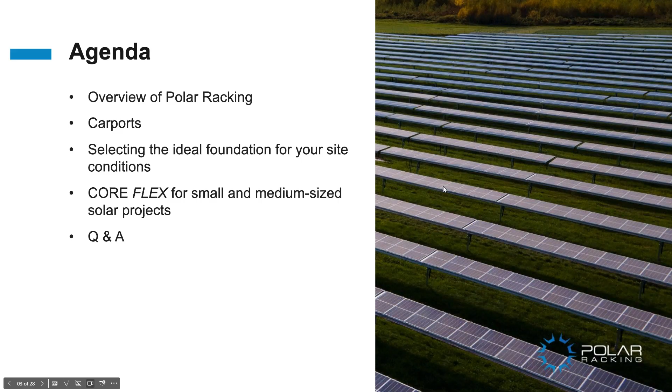So about us, we're the North American leader in the design engineering. Oh, I think we went back there one, Keith. Oh, mine shows the Polar Racking slide. Oh, strange. One moment. Oh, there we go. Coming up for me.

Perfect. So we're the North American leader in the design, engineering, and manufacturing of PV-mounted systems. Our vision is to deliver the highest value to our clients at the lowest kilowatt hour possible. We're able to do this by offering a turnkey solution, which is modular, lighter, and quicker to install versus many of our competitors. We have full service customer support. This includes a variety of things, including engineering collaboration tools, technical services, and installation support.

By that, we mean that we have multiple reps all across the country. We have myself and Andrew Golding based in Calgary, and we handle the West. Keith also comes out here as well. And then we have Matthew Crevier, who handles Ontario and Eastern Canada, and Keith helps support him that way as well. So should you have an issue or there's something that we need to come to site for, we could be on site in as little as 12 to 24 hours.

So we have a diversified portfolio that services multiple industry sectors, including commercial, community solar, and utility scale projects. So within that portfolio, we have our fixed tilt ground mounts. We'll cover all these in a moment.

Oh, there we go, perfect. Yeah, you can just leave it here.

So our primary product line that you'll be working with through BayWa would be our CoreFlex system. The CoreFlex system is an off-the-shelf racking system available at BayWa. Generally, we like to keep this in stock. It's designed to meet the demands of Canada's climate. We've designed this with the cold, the hail, all these things in mind.

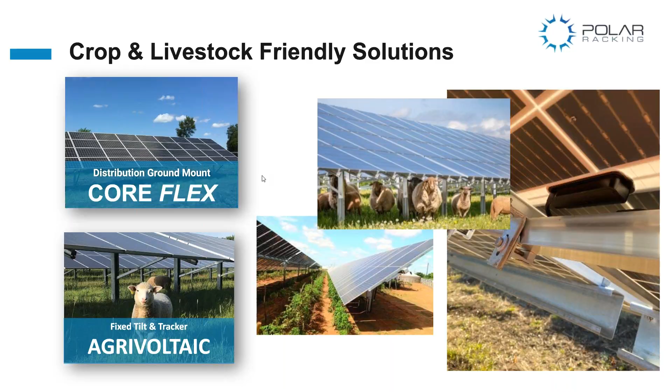Thank you, Joe. Yeah, so just wanted to talk about the CoreFlex system. This is our biggest seller with BayWa. It's the most versatile system we have. It's built to go anywhere in Canada, with the exception of a small area, which we'll go over later. You have to have the foundations designed specifically for your area, but we have everything from a single post, dual post, can fit the majority of available panels onto the system as well, and up to 1 megawatt in size.

This is a very practical system. It doesn't need the special engineering for each site. You're able to design the foundation site specific, but still have the feasibility of the rack off the shelf. It comes with galvanized steel G90, but let's just go through the product, the details, its features, and all the adjustability it has as well. So this Core system's been around for quite a while.

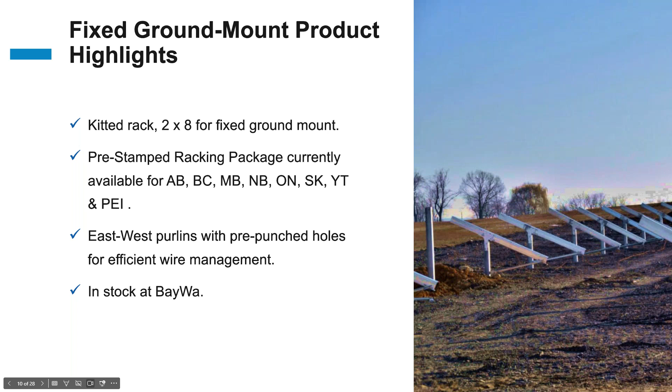Also, they're currently in stock with BayWa, so if you need any, you can get them off the shelf pretty immediately. This is the package we get, the data sheet from the trade shows. We're going to make this downloadable or pass it along to BayWa as well. So it has a lot of the just generic information for wire management, structure, formatting, and all that fun stuff. And it's a general layout of the system.

So if you have the larger panels, you'll see there's a gap in the middle for the smaller panels, and then the larger panels just go end to end. It is very modular based, so you're not going to get 100 panels long touching with no seams, but this is designed so that each table can work independently and not count on the others. So if you have a site that you don't need a layout for, you can just go and build them wherever you have to. We have some sites where they're built on the side of a hill, so they put 5 tables here, 5 tables there, and go everywhere.

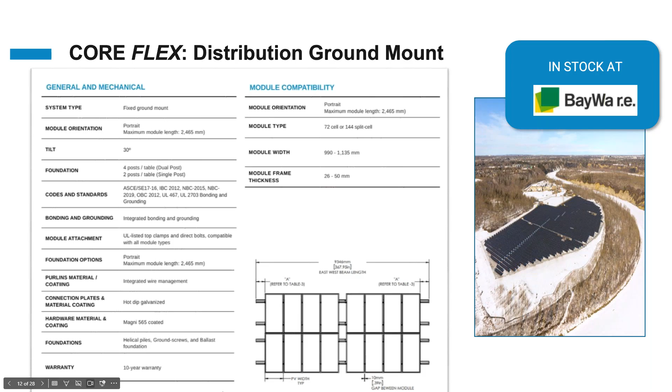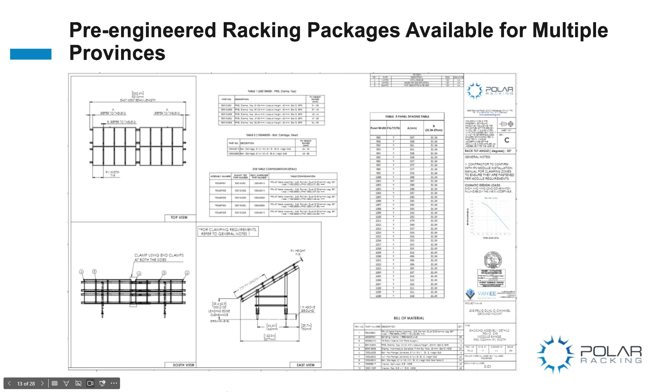And this is, again, the rest of the design package that goes over the parts, the assembly, often needed for submittal for any building codes or submitting to the community before you go live with your system, but this is the part of the package you'll receive once you're complete and you meet the foundation requirements.

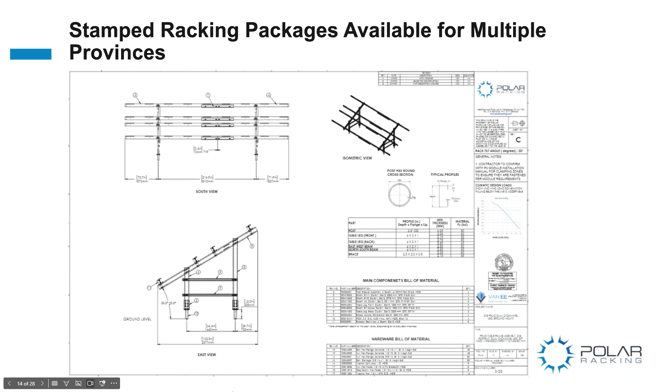So just going over the general parts, you have your A-frame, which is parts 1, 2, and 3. That system could be a single post or a dual post, depending on what you end up choosing. The most commonly stocked is a dual post system. However, there is a single post conversion kit, which BayWa, I believe, has now. I know that was something we were talking about years ago, it feels like now, but I'm 90% sure you guys have the conversion kit to turn a dual post into a single post. And again, that comes down to your foundation decisions later.

You've got your larger east-west beams. So they're what take the brunt of the labor. That's your beams, number 5 there. They're gonna hold all your modules up. They give you your spans. And then you have your panels, your clamps, and we're gonna go over all the adjustability and all the connections on the next slide.

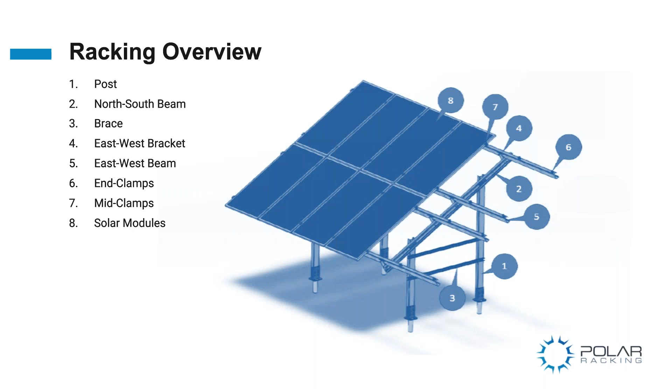So the biggest thing about our system, aside from it being extremely durable, is the adjustability. It has by far the most forgiving foundations out of all the systems that I've ever worked with. It has 2 inches vertical up-down tolerance after the foundation is installed. You have 3.5 inches each way in the north-south direction of the beam. You have another 2 inches east-west in the east-west beam clamps, and another 3/4 inch in the bracket.

So if you add those all up, you could have a foundation that's off by as much as 7 or 8 inches and still have a beautiful transition. It can be off by even more and just not have a pretty transition. So it will still be structurally sound, it'll still be nice and secure, but you can build a beautiful site with the transitions using all these adjustments and getting away with foundations.

I know a lot of the other foundations, you've got to be accurate within quarters of an inch or an eighth of an inch. These ones you could do with a tape measure and be well within building tolerances and structurally sound and aesthetically pleasing.

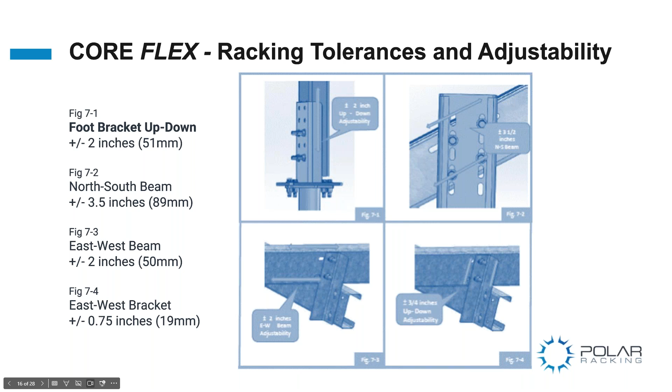So wire management is a function of the system as well. If you have a single table out in the field, you don't want to build a fence around it. A lot of people can just use the C channel and add in like chicken wire over it to run your thing. The thing is fully integrated bonding, so you don't have to run any jumper bonders from the panel to the racking system. You're fully integrated. You're able to use the rails to hold everything in place, and you can just go from there.

The clamps for the system now are fully integrated bonding. So if anyone's built with us in the past and you remember those bonding WEEBs that were a bit of a pain, they're no longer an issue. The clamps are fully integrated bonding. So there's no little washer you're putting between the modules. There's no special addition you're doing there. If you're doing the clamp method, it's just direct bolt clamp or clamp method, and that's fully integrated. So it just saves you time and effort on that.

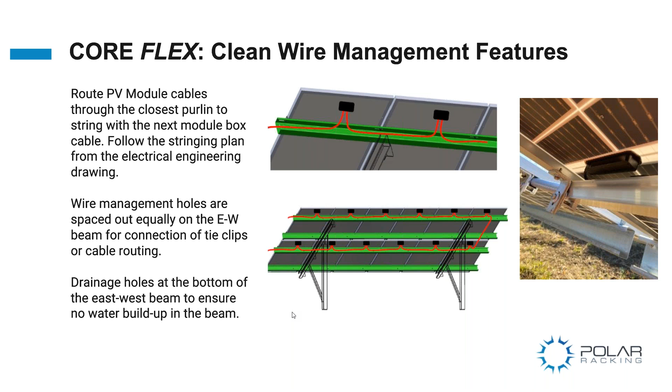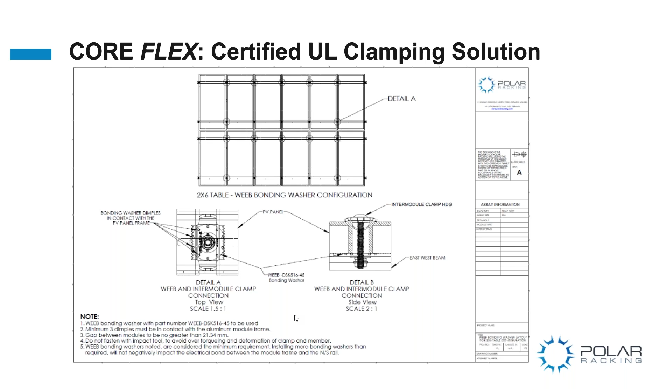Next, we go over foundations. The foundations for this are very site specific driven. So if you're in an area like northern BC and you've got solid rock, your options are ballasted or some sort of above ground option. If you're on an island and the only thing they have on there is a driven pile option, that's an option as well. You basically need to design something strong enough to meet the loads, but this system can work with any foundation given: ground screw, helical piles, driven piles, or ballasted.

There's even some sites where it's directly bolted onto the bedrock of the site as well with an epoxy and bolts. But again, those are very unique situations. But we'll go through the foundation types and options and then what you're looking for as well.

So the CoreFlex system is pre-approved by a third-party engineer, so you're all covered there. We have to look at the environmental forces such as lateral and axial loads for your area to make sure that the wind, snow, and frost loads are taken in, and those are normally the governing loads for those sites. Frost depths also matter as well, but again, this is going to come to your foundation supplier. Again, I believe BayWa has some foundations in stock for you as well, and here's the options we have.

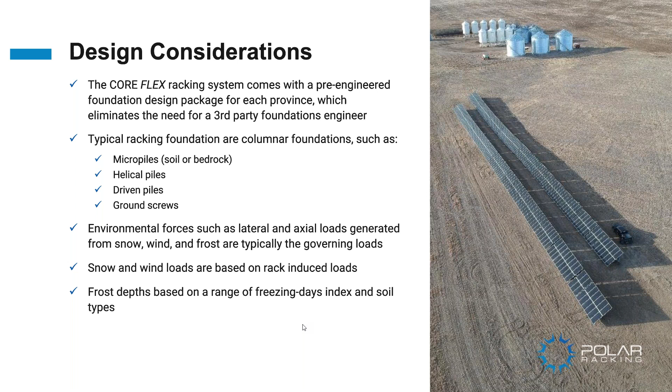You have a helical pile, a grouted post, driven, ground screw, and a precast, pour in place, or precast geoballast. So basically geoballast is rock instead of concrete. But again, it's very area dependent. West, you're going to see something more like a helical. You've got the nice ground with the odd rock. As long as you don't hit it with the helical, you're fine.

A driven post in our northern climate is less ideal. It's just too frost driven. So if it has a surface area larger than a round post, it will get affected. And then we find ground screw to be the most practical for the dual post options. So dual post options, you're going to have a back leg and front leg, and then the thinner, smaller screws just go into almost any surface.

The only thing it won't go into is gravel. So you can rock drill into rock, you can put it into clay, you can put it into mixed soils with the odd boulder, and it will just deflect off or go past it. So those are your main options.

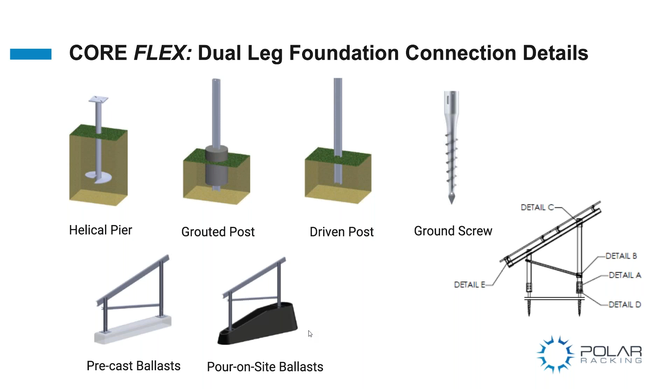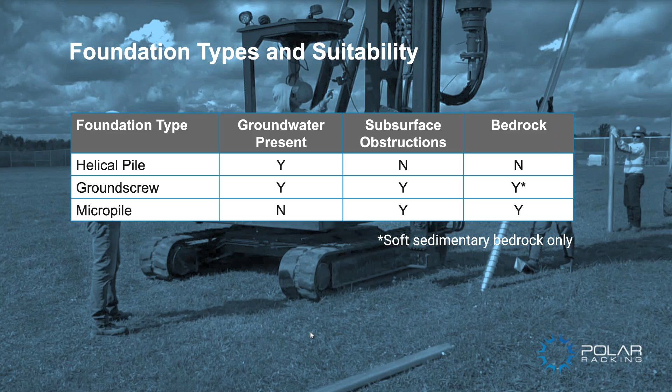So these are the loads you have to use when designing your foundation. A single leg is obviously going to see a lot more axial load and moments than the dual post. So if you have great soils and access to larger helical piles, you want to go with a single leg. You're putting in half the foundations - they're a lot stronger, sturdier, and they just look better in the end too, in my opinion.

The dual legs, not saying anything bad about them, but they have a very different load to them. Because there's two posts, the moment is almost gone since they share the load and don't allow a moment, and the other loads are a lot lower as well. So if you have not-as-great soils, or only access to ground screws, or just want to do a dual post because it's fairly simple to install, that's a very valid option. Dual post is the most common because it's the most likely to work, the most versatile, and it just works everywhere.

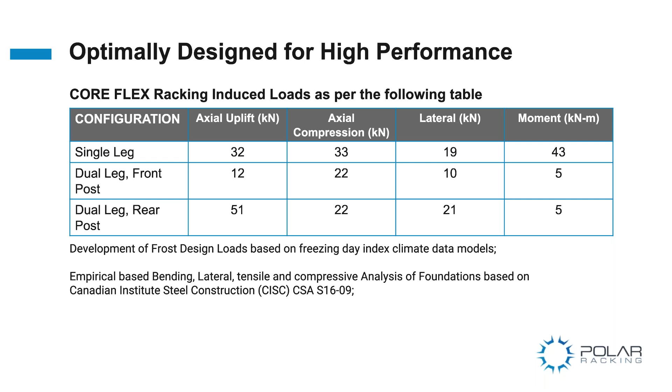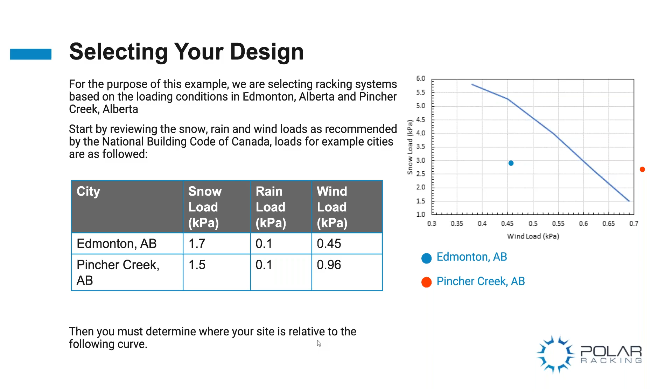So here's where we find the frost depth design. You can go to the website climateatlas.ca/map/canada, in the bottom left corner, and pull up the snow zone, the freezing days, the wind loads, and all that stuff for your area. Put it in that list, or graph, you saw behind us, and see if your zone works.

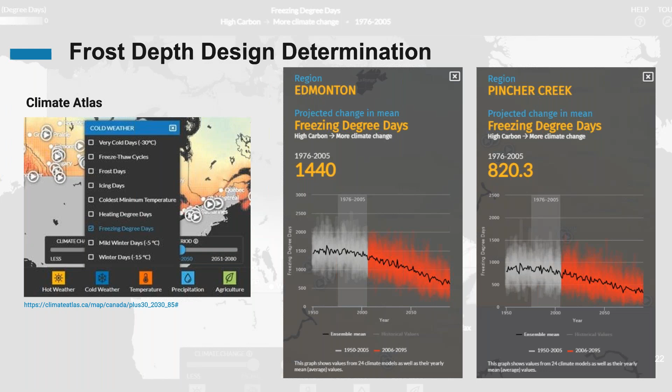Desktop evaluation - a lot of these decisions could be made on your own. If you're looking for help, or if it's your first one, or for example you're doing it for a city or public space and want some help, we can also assist you with these tables. You can go through the groundwater table, we can look at the predominant soils for the area, as well as the frost zones for that area, so we can help you. But most of these tables can be completed on your own - you don't need us to do that.

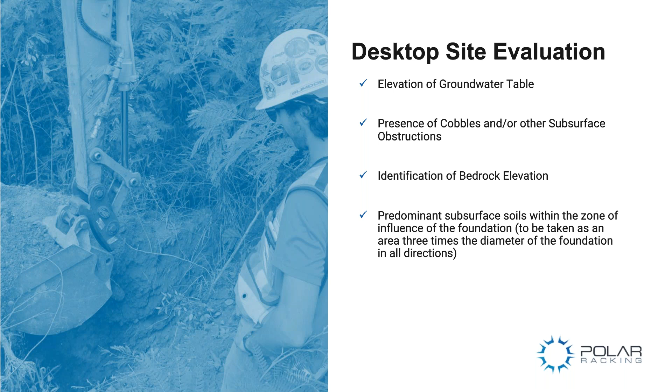Oh, sorry, everyone, I was on mute there.

So why Polar? What makes us unique? With 15 years of experience under our belts, we have proven our knowledge and expertise within the renewables market, the Canadian climate, and our customer needs.

We have end-to-end customer solutions and customer support, including anything from engineering, foundations, installation, construction, training, and project management. One of our big benefits is that we also have coast-to-coast support, including our local field service reps, which are Keith and Andrew, as well as myself and Matthew supporting the design process.

Another big thing that we do is we design our systems for ease of installation. For example, we use serrated nuts and bolts so that we don't have to use washers. If anyone has built one of these systems before, not ours, but anyone else's, no washers basically means one less thing to install, but it also means one less thing that can get lost and needs to be replaced. So we do design our systems with these features in mind.

We're also the only Canadian racking supplier able to operate at our scale and capacity. So I want to leave you with the notion that although we are very big within Canada, we are also able and capable of supplying racking for any product you may have in the US or abroad as well. Please don't hesitate to reach out if you have anything that might meet that criteria.